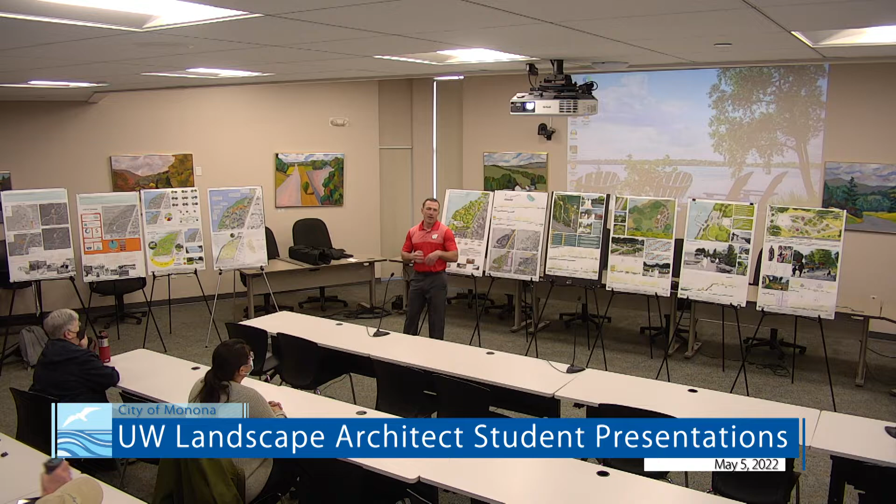Eric Schukart, program director for this program, discussed with the city on ways that students could be engaged in a semester-long program. So we're excited today. I'm going to introduce Eric and then we're going to get along with the students.

These are conceptual plans and just for planning purposes only. It's a great student project. As most of you in this room know, the official consulting project will be kicking off here this summer with a firm that needs to be selected yet. So without further ado, Eric Schukart, UW Landscape Architect.

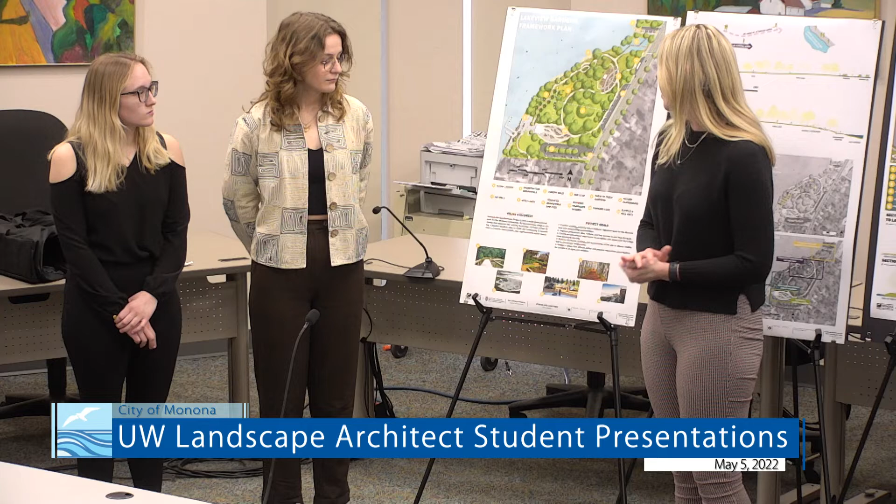Our next site elements include the bus stop along the northern part of the site, allowing for more accessibility and variety of transportation into and out of the site. Number 5 is the farm-to-table gardens, pulled from an inspiration picture, which would allow for greenhouse space and a variety of raised and ground level planters for different plant sizes and types. The nature playground is pulled from inspiration as well, using existing materials on site, possibly removed trees or other natural materials, allowing for a more immersive experience that appeals to a wider demographic and encourages imaginative play among the kids.

The seventh element in our framework plan along the western side of the site is a lit walkway, which will be bordered by paper birch on either side, which grows well here in Wisconsin. For the paving, we'll use stepping stone pavers to keep with the natural feel of the site, with the goal of not changing too much of the existing landscape.

The next element, number 8, spans this entire open green space and will be more of a traditional park space with open lawn, park benches, and a lot of canopy cover, which could be used for picnics, open gatherings, and passive recreation.

Over here, this gray spot, it might be hard to see, but this is a terrace boardwalk and pier, which extends out from the San Damiano house and is aimed towards getting a greater connection to Lake Monona.

It's kind of hard to see, but there's an accessibility ramp. Right now, the shoreline is not too accessible, so the goal was to expand that shoreline to make it a space people can use and utilize that amazing view out to the lake.

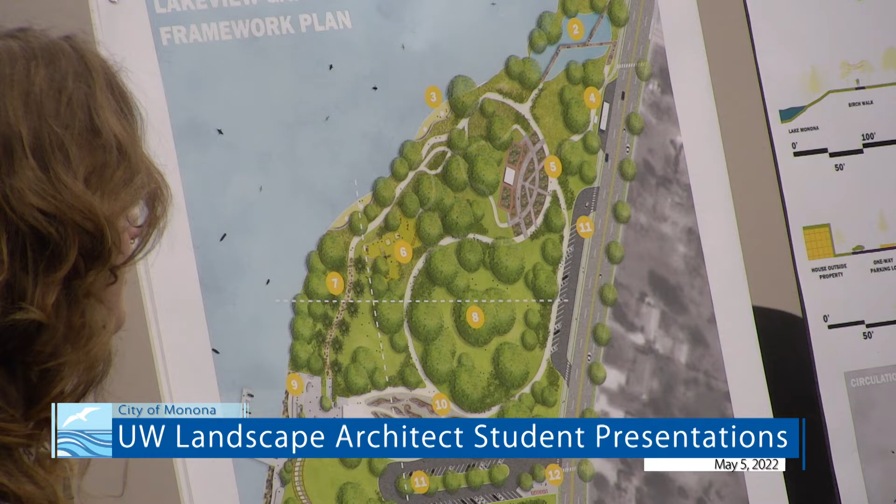The current site has a carriage path that goes up to the San Damiano house, and that's currently the only paved pathway there. Right now that's around 0.16 miles, but we're proposing adding 0.86 miles of pathways to the site, which you can see here in the light gray.

And then with the Terrace Boardwalk and Pier, that would add an additional 400% increase in ADA accessible shoreline.

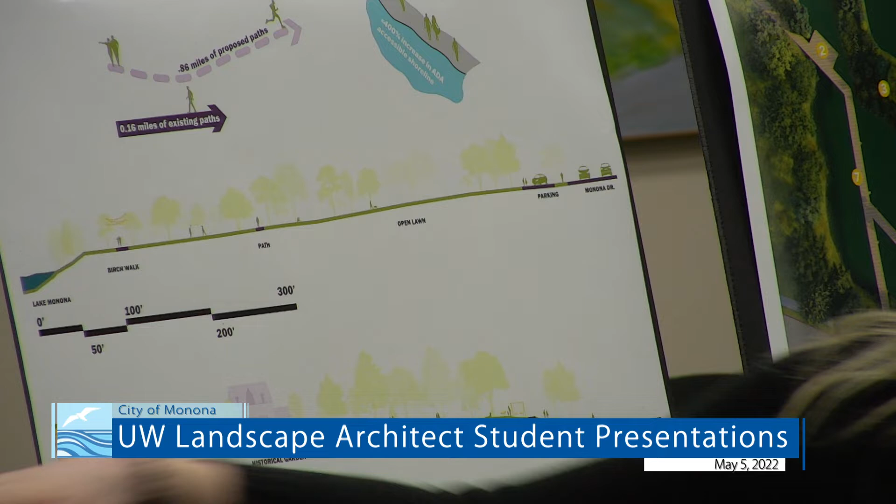For our section cuts, we have the top section cutting through on this horizontal dotted white line, and the second one on this vertical dotted white line. Those give you an idea of the elements and their relation to each other, as well as how our site elements follow the topography of the site, allowing for that lakeshore access.

Our pathways are 8 feet wide as well, to allow for more space, bigger groups, and more accessibility.

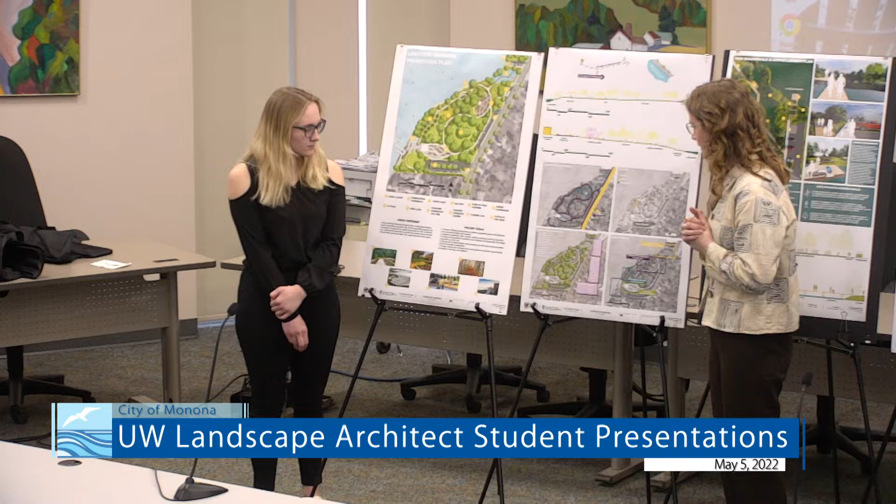Moving on to some of the site diagramming that we did. Right here we have a circulation diagram where we broke our paths and other modes of transportation up into primary, secondary, and tertiary levels. Monona Drive, obviously a lot of transportation is happening along there, so that's our primary circulation route.

For secondary paths, we have the existing sidewalk that runs along the whole site, as well as the main loops that we have within our site.

We are proposing to make a connection through a current private lot that would connect to the Lake Monona bike loop. And then for our tertiary level of paths, we have the boardwalk that we're proposing, as well as the paths that go through the more natural area of the site.

And the garden, as well as through the ornamental historic garden. For this diagram, we have lighting and drainage mapped.

Our yellow dots show where we are proposing to add lighting to make the site a bit more safe and usable during the evening.

Something to note is this walk that we're kind of focusing on to create an experience with maybe draped lights. And then for drainage, we're proposing a bioswale in the parking lot to collect water from that surface, and then drainage in there.

With all of the pervious pavement that we're proposing in this area, we thought drainage along the shoreline would keep those pollutants out of the lake, as well as assist with erosion along the shoreline.

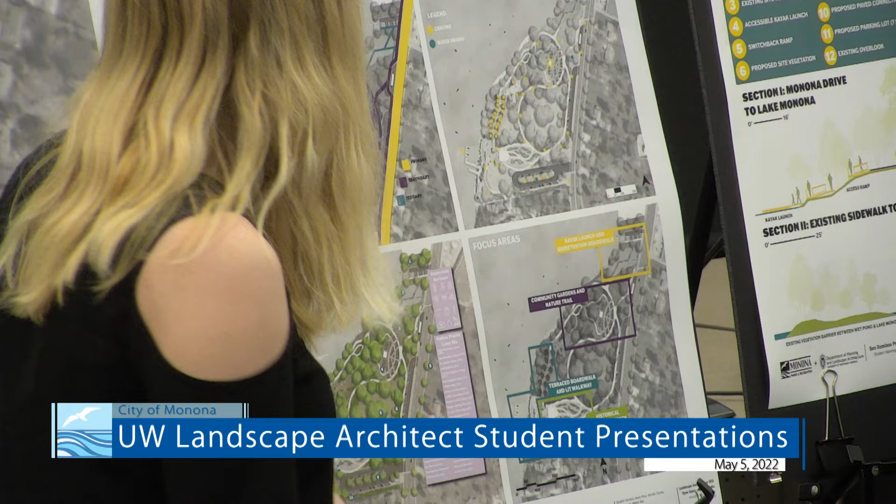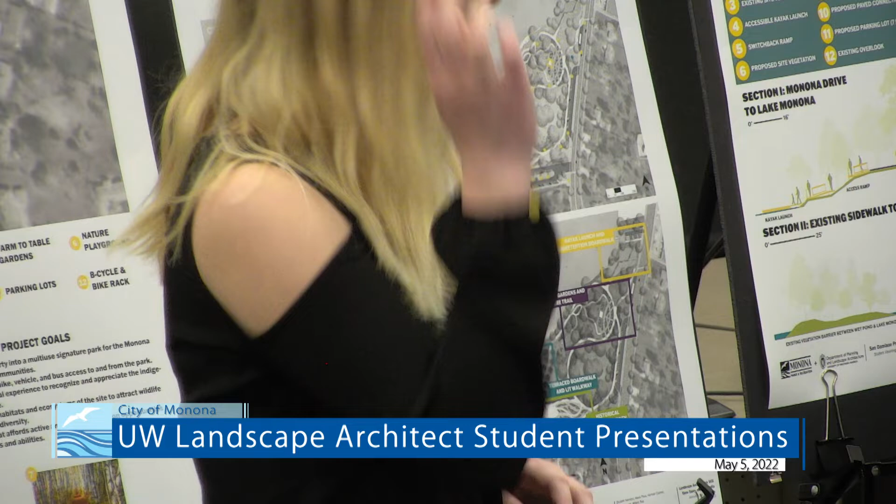Moving over here, we each picked a focus area to go more in depth. So the first focus area is the kayak launch and bioretention boardwalk. Second is the community gardens and nature trail. Third is the Terrace boardwalk and lit walkway. And then lastly, we have our historical narrative garden.

So with the new boardwalk and kayak launch, this is a plan view of what that site would look like. As you can see, we are proposing buying the lot directly adjacent to the site that's currently vacant. There's not very many trees, it's pretty flat. There is a 10-foot change from here to the lake, but I'm proposing that we put a switchback ramp going down so that it's ADA accessible and less of an extreme drop down into the water.

Labeled by numbers up here, this is the connection to the existing path. This is kind of an overlook, so you can look directly out onto the lake. And then these are just the site vegetation. And at number 4, that would be the actual kayak launch itself.

So with that, it would be a launch where you're able to slide down a set of stairs into your kayak and then go out from there. So people in wheelchairs are able to use it, and that would be the only kayak launch with ADA accessibility in the Madison area on Lake Monona.

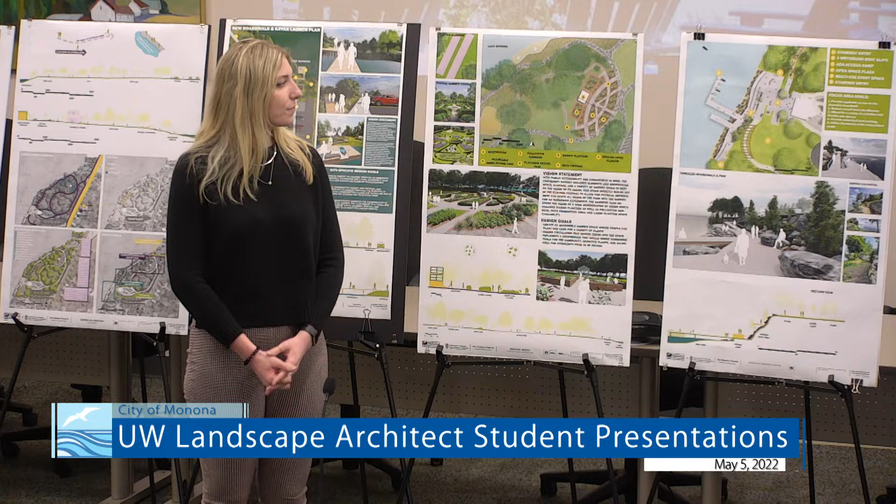Alright, for the next focus area, we have the Terrace, Boardwalk, and Pier. I don't know if you've been out to the current property, but this is one of the areas with a pretty steep slope down to the water with a small lookout terrace, which we heard from Jake was a really popular destination for people coming to the site. So with those views, we really want to accentuate that with this Terrace, Boardwalk, and Pier without interrupting the landscape too much.

A few of the elements we have are 2 stairway entries at the top and bottom, 5 motorized boat slips, an ADA access ramp that will provide wheelchair access down to the first level of the boardwalk, a multi-use event space which will be open lawn with a pergola in the front. This could be used for anything from weddings to company parties or anything like that. And then an open space plaza in the front of the San Damiano house.

So with that goal in mind of not being too intrusive to the landscape, we've scattered a few boulders which will provide flat seating on the top level of the plaza, as well as down on this first level. As you can see, they're pretty low, but with just one level of a wood planked boardwalk that's about 2 feet above the existing grade, it'll allow for easy access to the water.

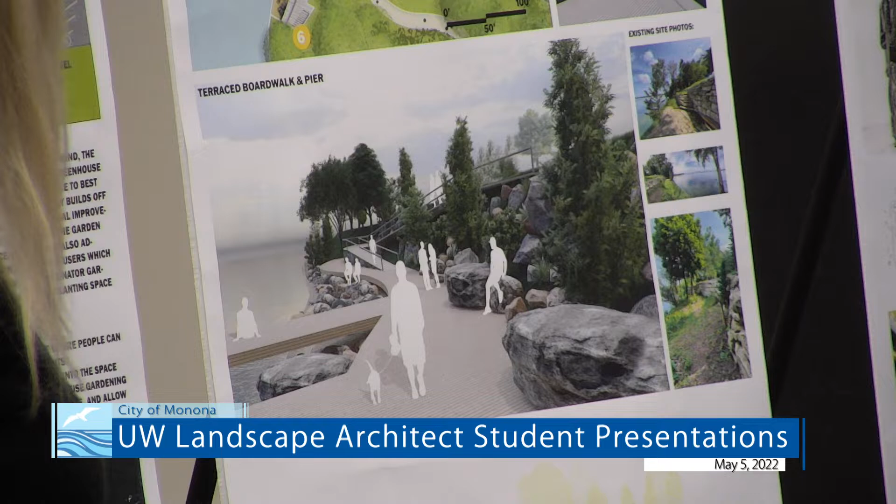It doesn't take away from being able to walk along this shoreline, which I'm sure a lot of people would want to do when coming to this feature. And then lastly, it also just provides that connection to Lake Monona that I think is kind of missing right now. So with that in mind, it has a sort of natural circulation coming from this, one of our only built elements, down to the water.

Then here's just a section that cuts through, which gives you an idea of how high everything is off the ground. We have the access ramp in orange, might be a little hard to see, but then the boat pier that comes out to the water, and a natural rock wall that'll reduce some of the erosion going into the lake, and also just be in keeping with the natural tone of our framework plan.

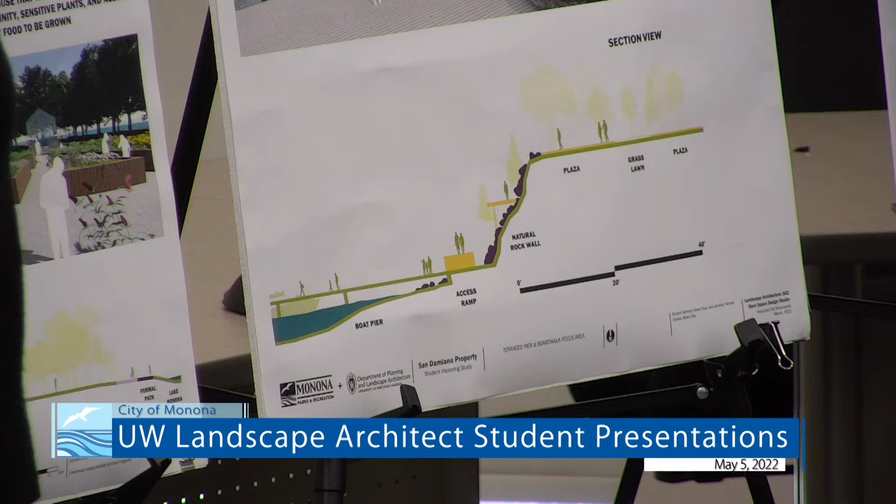Right, and lastly, my focus area was the historical narrative garden. Here is my site plan. So the vision that I had for this space was to uniquely tell the history of the site. The site has very rich history that we analyzed previously, and I thought that it would be a good opportunity to include that in the actual physical landscape.

So the ornate planters that you see are kind of inspired by traditional Ho-Chunk textile design. I thought that our space really needed a tribute to the indigenous history, so I wanted to emphasize that. Traditional women's applique, as you can see in these photos, served as the inspiration for these abstracted forms.

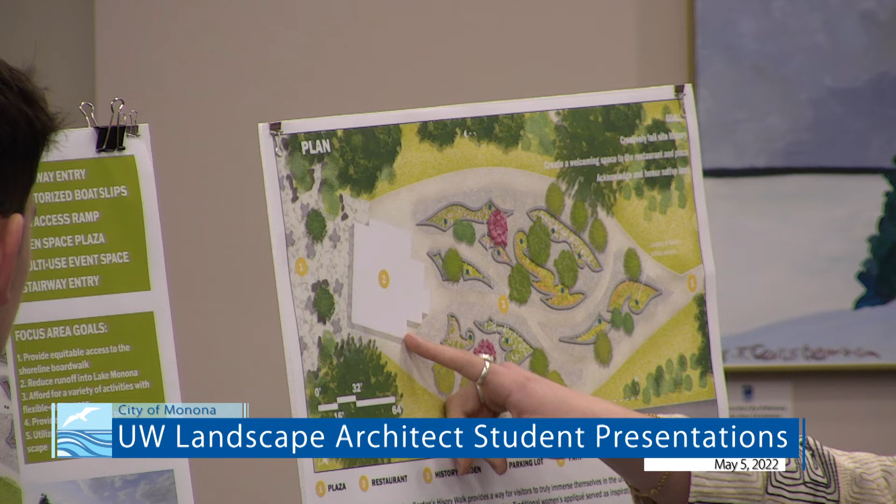Going through the plan, we have the plaza on the back side of the house that we are proposing to convert into a restaurant right here. Then the history garden itself - these small teal-colored dots show the location of small historic exhibits, small statue artifacts that would provide guests a way to educate themselves as they walk through the site. And then we have our parking lot that connects to the garden itself, and the existing pathway.

So you can see here the process I went through of abstracting these ribbon work designs that are popular for formal wear.

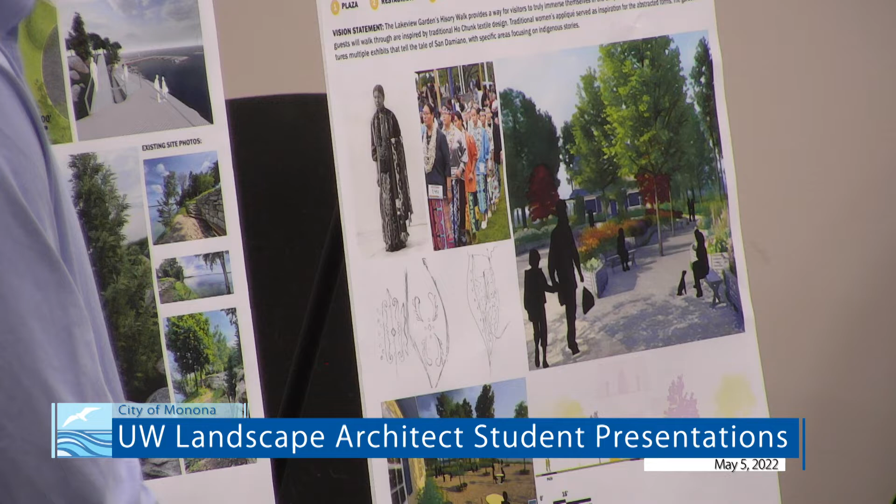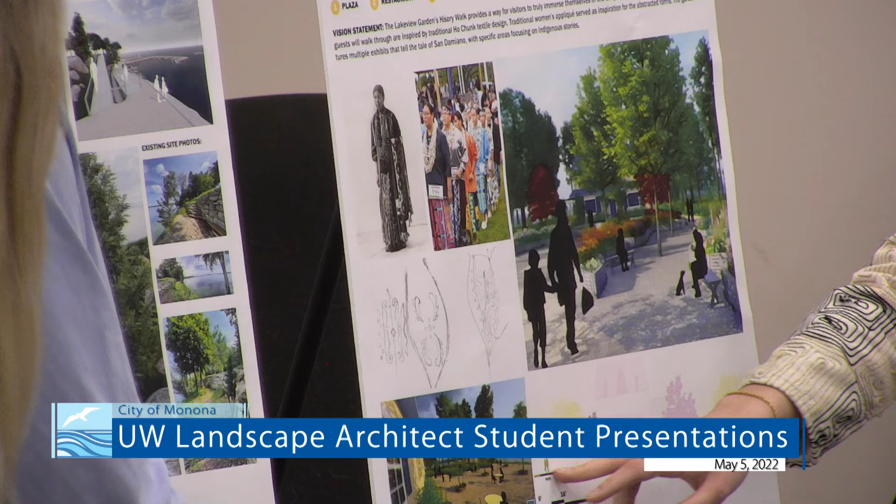I have two sections. The first here cutting through vertically, you can see the path and how it leads you in. The house is in the background, and we have the planters, which are about 1.5 feet off the ground.

This other section cuts along the bottom and looks at the site from the parking lot. You can see the plaza in the back, and then the planters in front of the house, which I'm imagining being planted with a mixture of ornamental and wildflower plants - lilac, maybe orange tiger lily, brown and black-eyed Susan, butterfly weed.

Thank you all for your time. Does anybody have any questions?

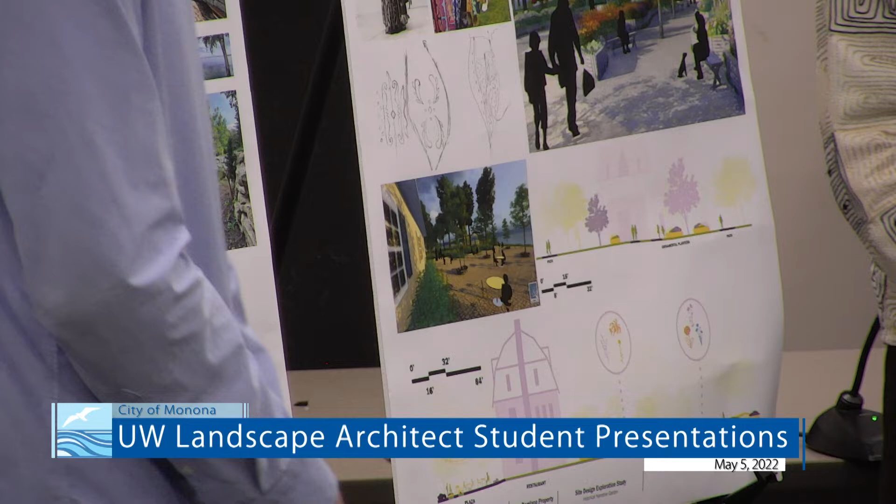Now, does anybody have any questions? Hold on, guys, stay up there so I can get your picture. Next year.

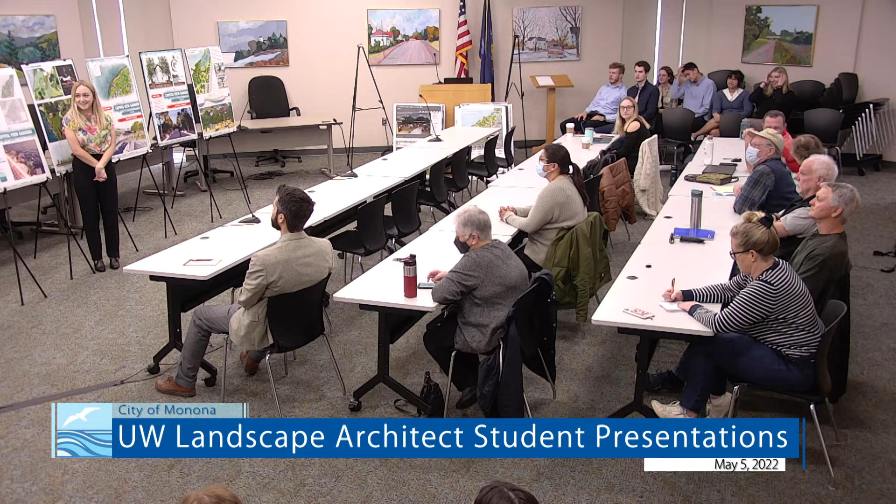So our project here is Capitol View Gardens. The name is similar to the last group. Great minds think alike, I would like to think.

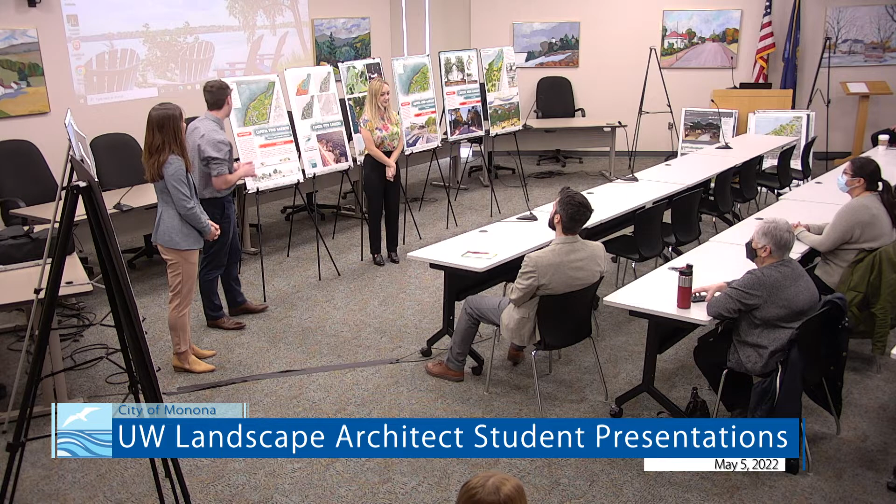We'll start with our vision statement here. Capitol View Park transforms the prior San Damiano property into a stimulating and inviting space, bursting with activity and vitality. Exceptional event spaces empower countless opportunities for recreation as the site strives to become a beacon and the center of Monona's vivacity, defining the city's blissful spirit.

Capitol View Park also aims to enhance its different wildlife habitats as it fosters biodiversity for different wildlife and vegetation, while exemplifying ecological awareness by integrating bioretention systems already existing on the site, enhancing those for different stormwater holding capacities, and thus keeping our lakes clean.

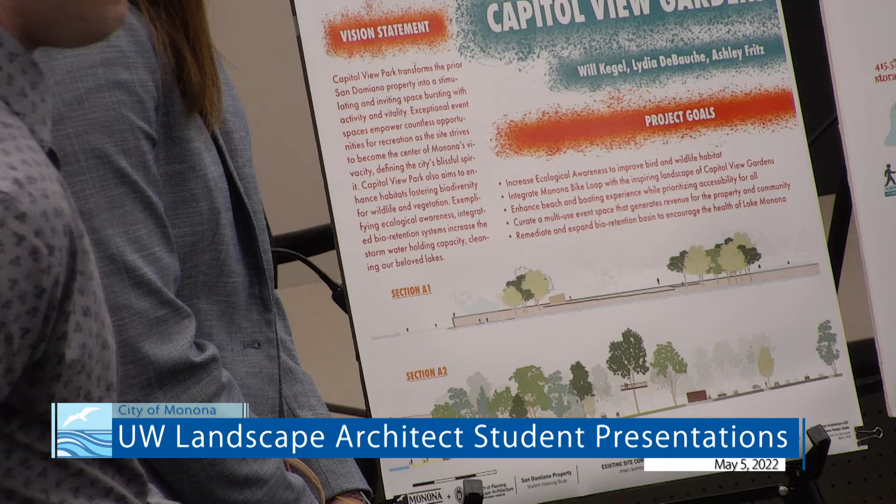We have 5 main goals for our project, including increasing ecological awareness and creating more of a habitat for birds, since birding is something that's currently used at the site. We also wanted to integrate the Monona bike loop into our site - we noticed there was a missing link, and this would be a great place to include on that bike loop. We also wanted to enhance the beach and boating experiences, since this is a popular spot for boaters to come and park.

We also wanted to bring that experience onto the land a bit more, creating a multi-use event space that could generate revenue for the community and become the heart and soul of the community. We also wanted to remediate and expand the existing stormwater system into a larger bioretention that will keep the lakes clean and healthy.

To talk through the site: first we have several overlooks to tie in the amazing views, as Capitol View is our title. There's an overlook right here, and then formal gardens as we created an event space. There's also our parking here, which fits about 60 spots.

It's a loop type circulation, so you come in here and you can turn through here, or go over here to drop off people for whatever event may be happening, and then you can also circle back through this way.

Parking goes both ways. We also have overflow parking, as events will accommodate a lot more people versus your day-to-day capacity. This will be in reinforced paving, so it will look like grass, but there'll be pavers through there to support parked cars.

There will be public restrooms over here by the adventure playgrounds, as that's typically where day-to-day people will be with their kids, hanging out, having a good time.

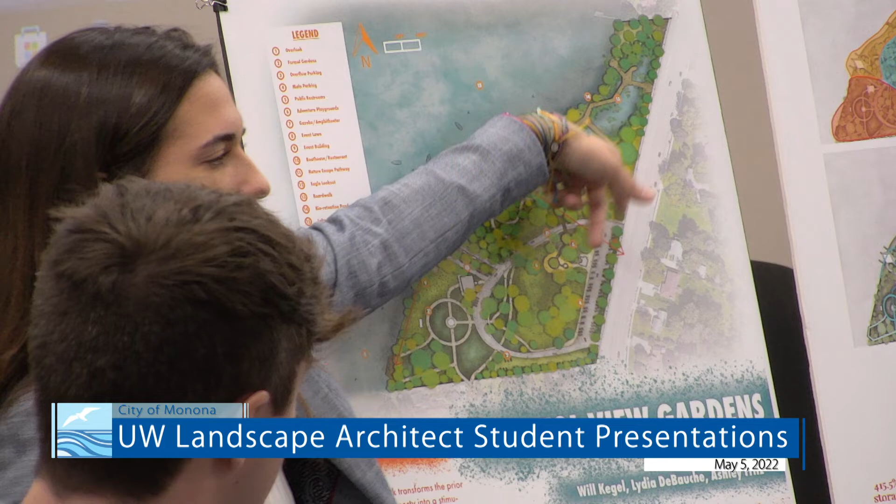There's a boardwalk here through the bioretention basin, which accesses the street here as well. There's a current bioretention here, but we are proposing to expand it, following the natural grade of the site. And then last, Lake Monona, which is kind of where all our thing is based off of.

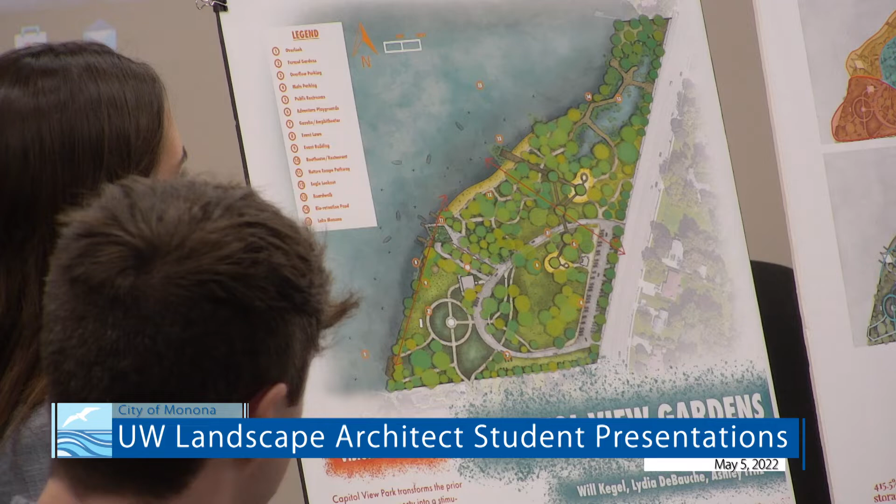On this board, we break down our site into 3 main zones: the nature recreation zone here in blue, the beach recreation zone in orange, and then the event space here in red, which includes part of the house and the part across from the house in the center of the path.

This diagram shows the main circulations of the path. In blue are the primary, secondary, and tertiary paths, but the main thing that's important is the Monona bike loop path through the site. It has its own dedicated path for part of the site, then goes through the nature recreation zone, through the woodland, and over the boardwalk and out.

That connection can be seen larger here. This is the connection that we made through the site, and it fills in a very large missing link that takes you off the water. We're proposing that it goes through our site and remains a true lake loop.

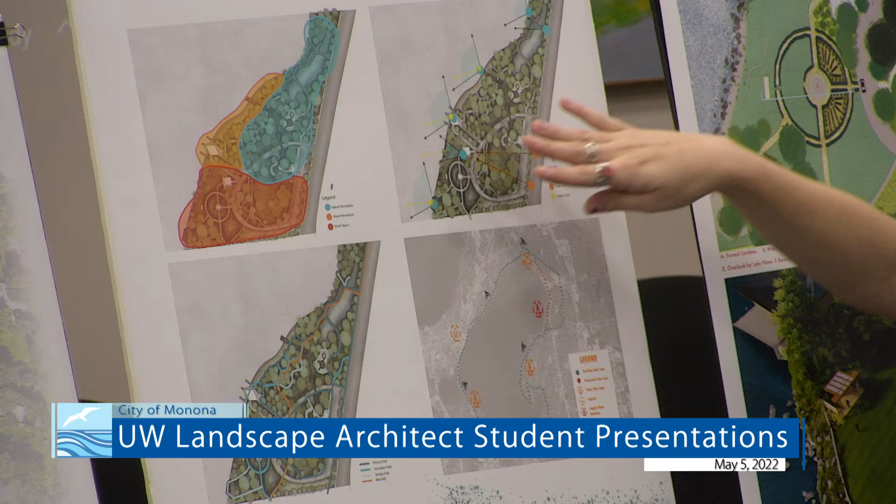Here you can see the views of our site. We were able to highlight these stars as Capitol views. The position of the site is very unique and has really great views of the Capitol, so we wanted to make sure we had as many Capitol views as possible, as well as many lake views, and some screen views of the estate from the road, so people know it's there and feel a lot more welcomed to the site than they are currently.

Through this, we were able to increase the storage capacity of the bioretention basin by about 400%, which is a huge increase, especially because it's the City of Madison's water, so we want to make sure there's enough room for it. We were also able to add about a mile of pedestrian paths through the site, an increase of 280%.

We were also able to decrease the turf area by 63%, so there is a lot more ability for stormwater to be absorbed by the ground, and a lot less maintenance.

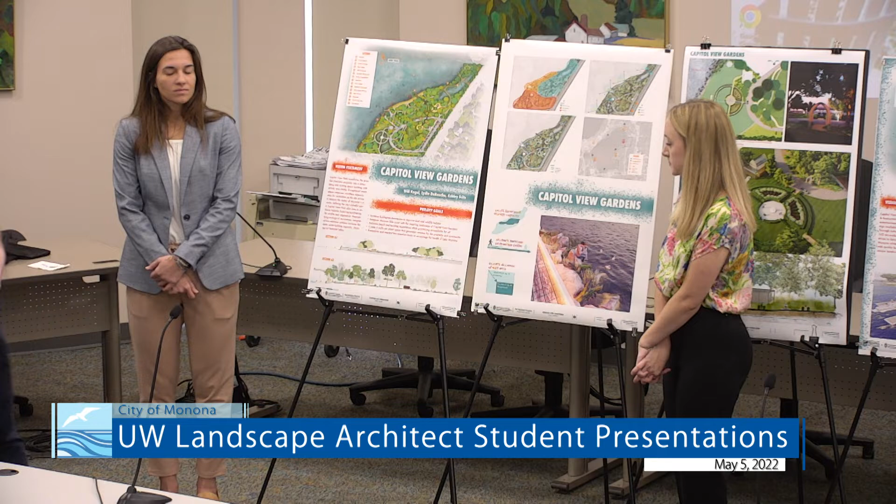Finally, we have this render here of 2 boys sitting on the rocks right on the lake. We really wanted to bolden that connection to Lake Monona. I think this render encapsulates all the goals and objectives of our design. Although we have big ideas like the boathouse and event structure, what it really comes down to is the human connections made in our park.

Now we'll go into the different focus areas. I focused on the event space.

This is based off of a formal garden, and formal gardens usually have 2 axes. The first axis runs through the middle, connecting the whole site to the water, and the other incorporates the neighborhood with the other built structures of the site.

This might be a little small to see, but this view runs down this axis. You can see there are different built structures all the way to the lake to concentrate that view to the water.

There will primarily be plantings in these 2 sections—hydrangeas, heavy on the flowering shrubs—and this space will be open. All the paths connect all the way through.

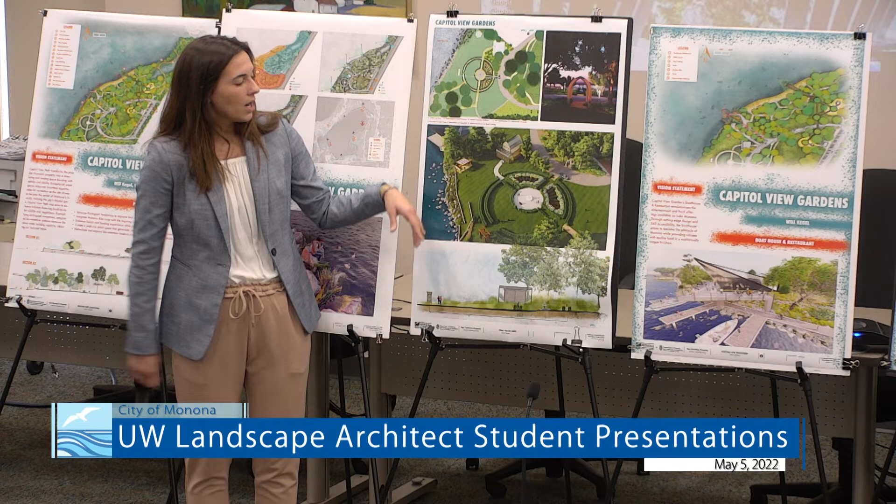This would be the gazebo, a way for different concerts or events to be held outside. It's also set up for the possibility of weddings being rented out, set up in front of the water with the arbor, while there's seating in the lawn space.

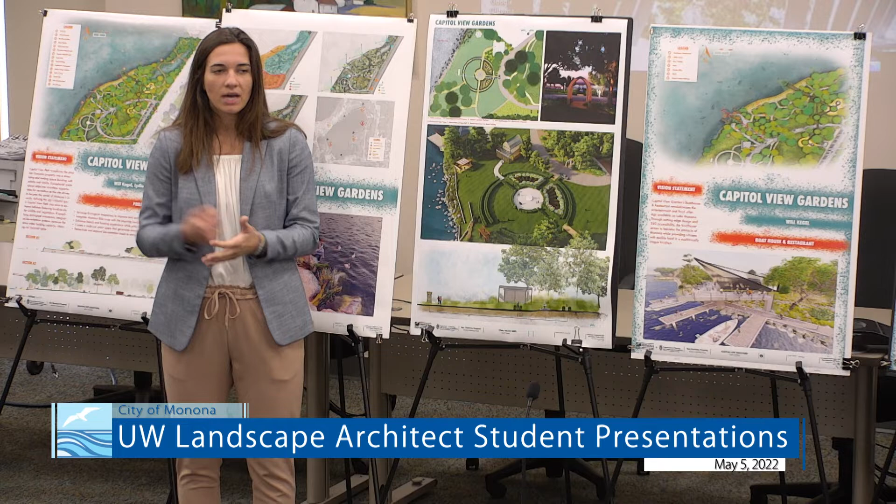This is a potential possibility of a building that could be there. There's a lot of really cool glass in the original building, so we propose to keep that glass and incorporate it into the new building, with a lot of sunroom-type areas as well. Also restoring the shoreline with rocks and plantings.

Moving on to the next interest area, this is the boathouse and restaurant shown here. A quick vision statement for this specific area.

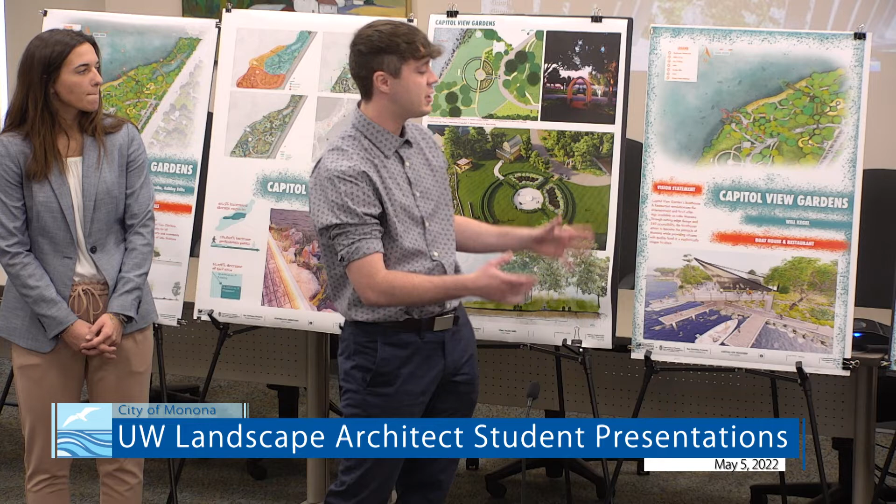Capitol View Gardens Boathouse and Restaurant revolutionizes the entertainment and food offerings available on Lake Monona through cutting-edge design and 360 accessibility from both land and water. The boathouse strives to become the pinnacle of Monona while providing citizens with quality food in a euphorically unique location.

Looking at this plan view, you see the boathouse. It actually juts off into Lake Monona, giving interesting views and opportunities for people to eat on the patio, right over the water.

Under that, there are different routes that are ADA accessible, and it also offers boat parking, continuing that 360 accessibility. We really just want to create a cool area with an emphasis on Lake Monona, very accessible from both ways.

So you have people boating, making a quick stop for a bite to eat, and we also have this beach northeast of the boathouse. We're really creating an area similar to Peninsula Park, if you're familiar with that indoor seating concept.

Moving on, here are some section views from the front of the boathouse. I wanted to develop an alley that creates a sense of space and generates views right towards the front of the boathouse, with an alley of trees and lights overhead, making this space exciting for both daytime and nighttime attraction.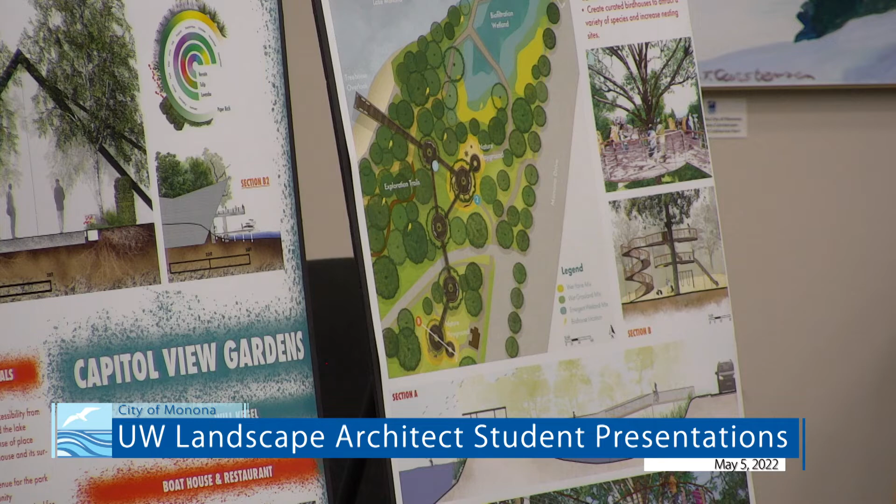The goals of my design were to introduce native species, to increase and attract wildlife, and to create a biofiltration system to better handle the stormwater.

I wanted to foster an immersive experience for birding, totally immersed in nature, which is a very unique experience about the site. I also wanted to utilize a hierarchy of spaces to allow active and passive recreation to occur harmoniously, and to create curated birdhouses to attract a variety of species and increase nesting sites.

So in the biofiltration wetland, I created a planting plan that includes a wet prairie mix, which will have a bit more flowers and be a bit more pleasing to look at, and then a wet grassland mix, which can be found along all sides of the wetland, and also an emergent wetland mix, just to increase the amount of natural species, to better take pollutants and sediment out of the water.

The raised boardwalk features seating and telescopes to look throughout the site at the birds and also out to the lake, which you can see in this picture here.

It connects to two nature playgrounds. One of them can be seen here, featuring a lot more slides and multiple levels. It's tailored a bit more for younger people, and this portion of the treehouse is a lot more aimed for children and for play.

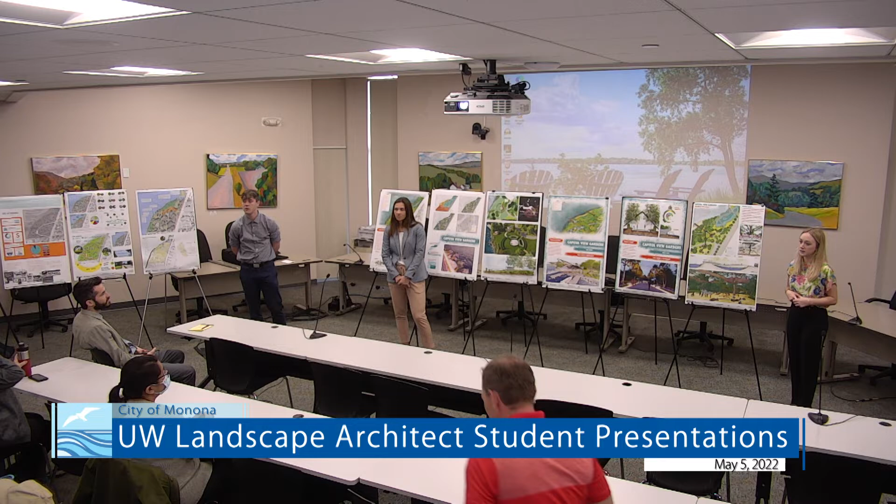How do you see the blending of your nature area with your boathouse, your vibrant restaurant area?

Yeah, that's a great question. So what we were really thinking, our first idea in the whole design process was to really create an event space. Jake talked about generating some type of revenue because it was such an expensive cost. So we thought immediately, right off the bat, creating an event space and then also a restaurant and a boathouse like that. But also, we looked at the northernmost part of the site and we saw the retention pond that's already there. And we thought that was a really good opportunity to build upon that. So spreading that nature and that woodland area that was existing, and kind of trying to blend that into some of the more commercial aspects of our site.

Yeah, we definitely included a pretty heavy vegetation buffer right there. So if people are coming for more of the calming, peaceful experience, they can still get that over here in case there are events going on over there. It's kind of like a dual site.

Additionally, we have a hierarchy of paths, so you can see here, this is more of a gravel path that would be for exploring, and then this is the main recreation path, and lower we have a fully accessible boardwalk on the beach. That kind of separates the three areas: nature recreation, further exploration, and the beachside boardwalk.

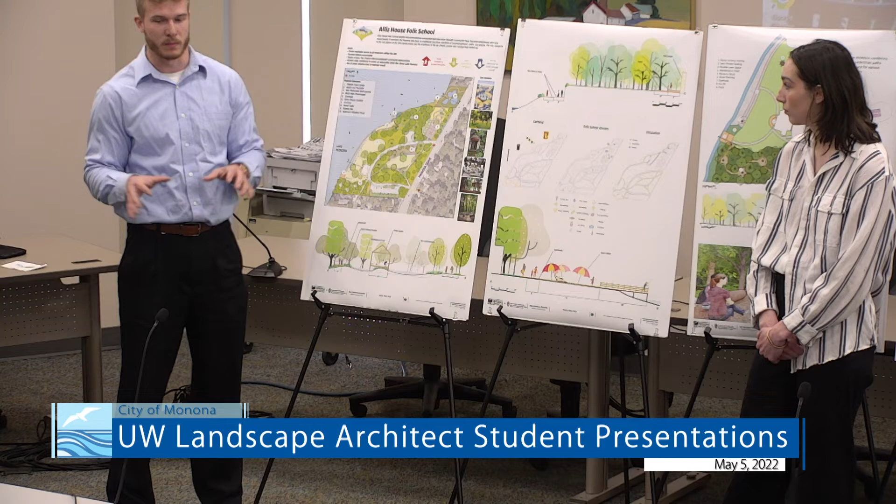So for our framework plan, right away we had to make space for a big open lawn for multi-seasonal events, including Snow Snake by the Ho-Chunk people, which would be a key event during the winter, for example, because we wanted to keep the site and preserve the historic legacy of the site itself.

The next area is the beach and facilities. There's a couple of sheds on the site itself in this section here.

Right down here, having space for storage, bathrooms, and other facilities, looking out to the water, having a sandy beach, because currently it is more of a rocky surface.

The next element is the Bird's Nest Playground, which is in the center of the site, which we'll focus on later in the project. It provides a playground space for the school itself, the folk school, giving space for the kids.

And then next we have an overlook cutting through near the site. This is kind of outlining the connection to the shore right here.

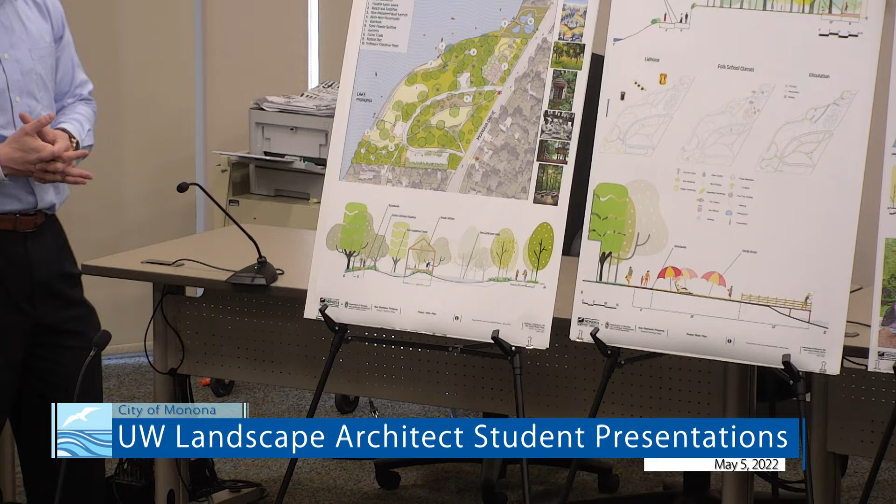Continuing with number 6 here, this area is some semi-private seating, which can be seen in this perspective. We're also vegetating this area more heavily, which will provide that semi-private seating experience while also doubling as a buffer to the homes that border the site.

Number 7 is these gardens, featured on the last board. Those gardens will have 3 different types of gardens, as well as seating, storage, and a swale that runs across the road to catch runoff coming from Monona Drive before it hits the plants, as well as capturing that runoff before it makes its way to the lake.

Number 8 is the forest trails, located at the northern end of the site, which was already more heavily wooded. We're proposing to make that canopy cover more dense and add nature paths, with a little section of relief for seating.

There would be seating and a fire pit, which would really help with bird watching and promoting the natural habitats of the animals present on the site—if you take a look at the inventory boards, there's a bit more detail on those.

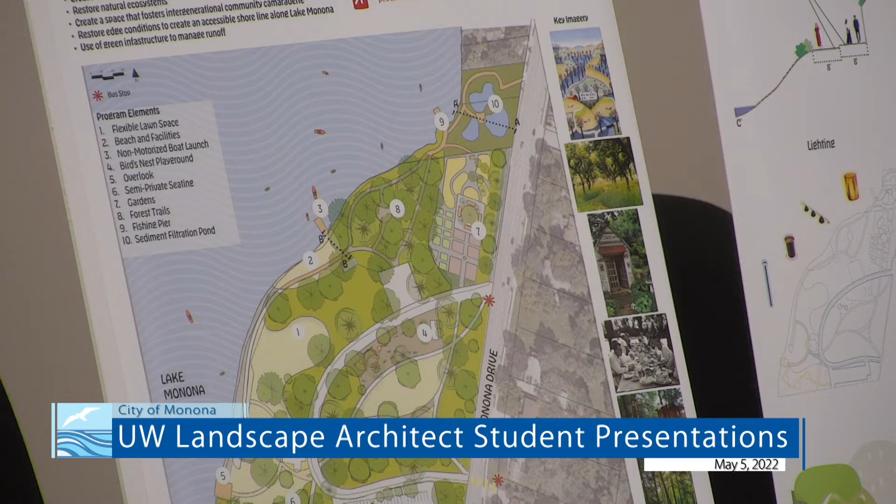Number 9 is a fishing pier, located near this wetland in the forest, providing a little quiet relief for fishing. We're proposing this would be a bit wider and remain in place permanently throughout the year, since it would be a hard spot to pull out for the winters.

Number 10 is the sediment filtration pond, which can be seen in this section here at the bottom. We're proposing 3 different ponds—the first is where that culvert comes out, and this would be the largest of the 3 ponds, with each pond filtering a different size of sediment.

The largest pond would filter the biggest chunks of sediment, the second the next size down, and the third the smallest. These ponds break up the amount of water coming into the site, and planting them with wetland vegetation allows water to seep out further should there be larger floods.

We're using those ponds as a feature on our site—right now there's just a big hole, so we're bringing it into the design as an element.

With a platform here, which you can see, this could be used to teach about the different wetland plants and wetland animals, as well as a boardwalk that runs through this area and connects into the sidewalk along Monona Drive.

Looking more closely at that is this section here, and you can see the sidewalk as well as a little buffer before the street, and the wetland plants.

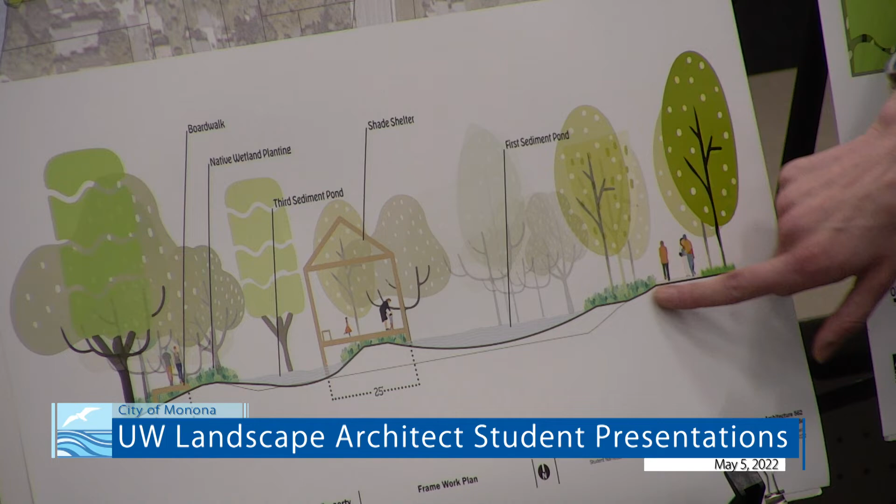Things would run into this pond. This platform touches all 3 ponds, giving an immersive experience, with the boardwalk connecting into that fishing pier and then into the more forested, dense area.

So this diagram here shows the lighting on the site. We thought that the area surrounding the house would be lit at night, and we wanted to keep the more natural areas dark at night. So these three types of lighting are dark sky friendly.

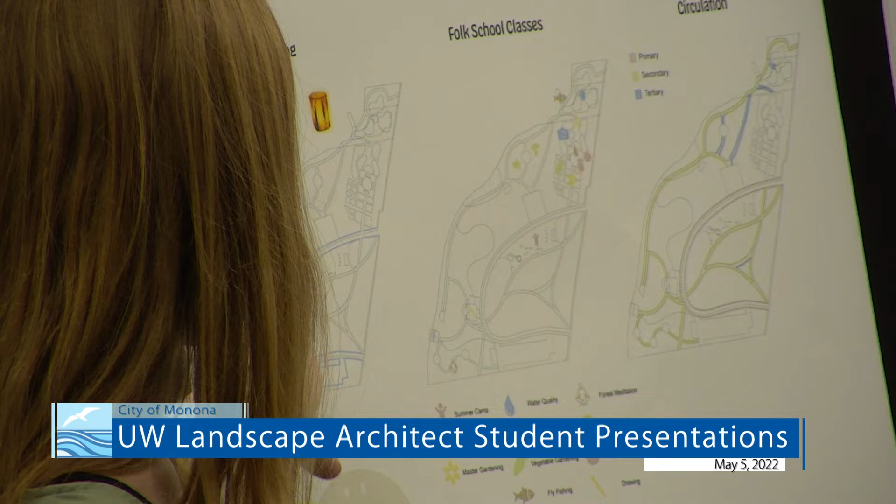Around the carriage path, the parking lot, and the sidewalk outside the house would have street lights. The path connecting the house to the overlook and the ramp would have in-ground lighting, and the overlook and porch would have string lights. The path through the woods would be lit with stumps, which are lit from the inside.

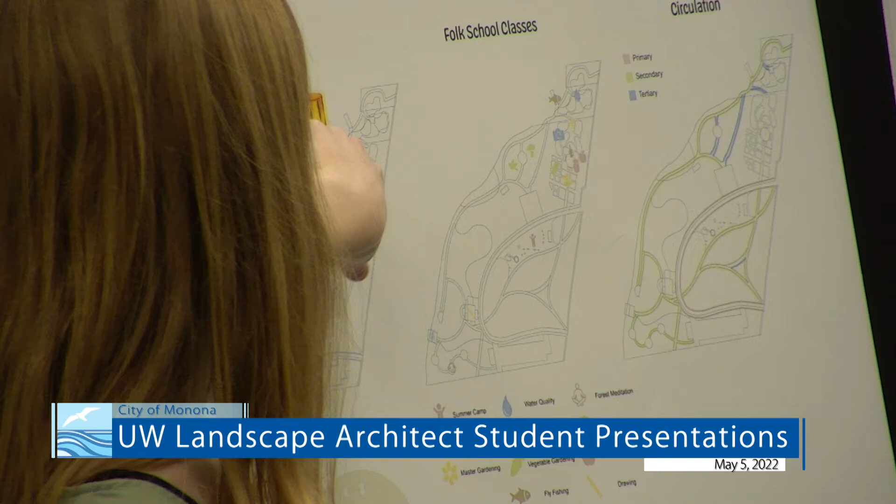Next, looking at the folk school classes and the kind of curriculum that could happen here, and connecting that with key elements on our site.

Some things like summer camp could happen all over the site, but focusing on our nature playground area and the house. Bird watching and other natural things like mushroom foraging or wild plants would happen in the wooded area.

Things like beekeeping, master gardening, vegetable gardening, and fruit tree grafting would happen in these gardens, and jam making would happen between the gardens and the house.

Things that could happen all over the site, like drawing and photography, both focused near the house and allowing people to spread out across the site and explore.

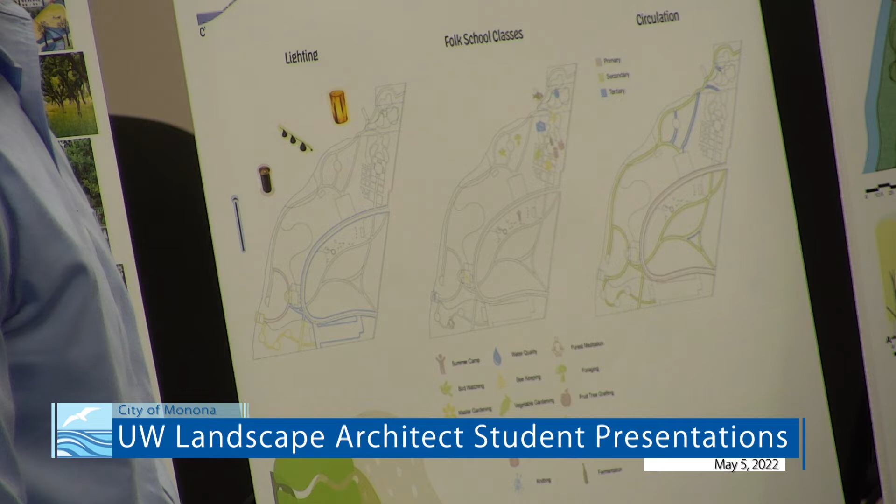Things with more traditional roots like knitting, sewing, embroidery, and weaving could happen within the site, allowing them to spread into the overlooks, the lawn spaces, and the private seating.

A big thing like forest meditation and other things like that could happen in the forest, in those little private seating nooks that we've created.

For circulation, revitalizing the carriage path itself would be the primary form of circulation running through the site, as well as cutting through the middle with more secondary paths near the open lawn space at the center, wrapping around the natural areas.

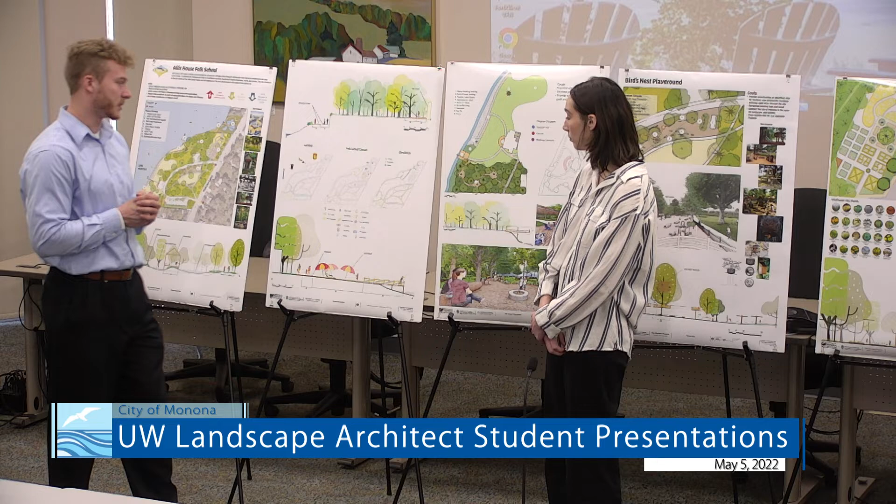But near the forest trails, there are more tertiary pathways breaking off, creating more intimate settings for visitors to utilize.

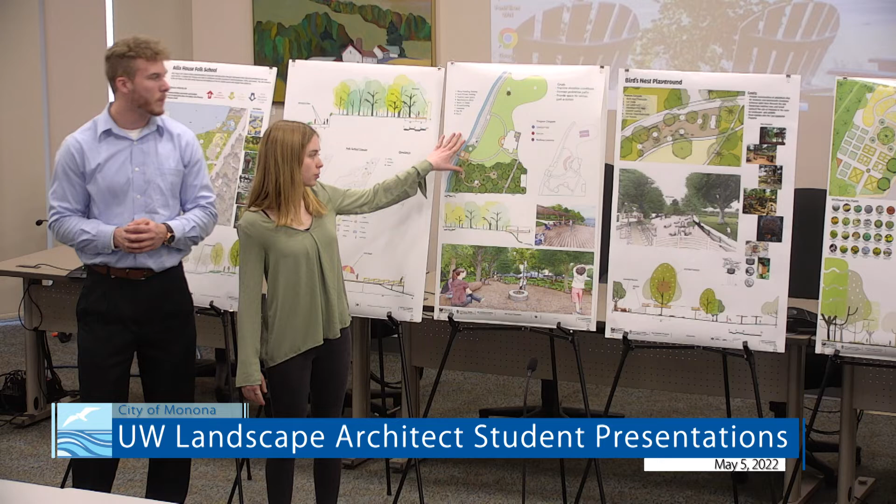I chose to focus on the southwestern part of the site, just outside the house. Goals for this area were to improve shoreline conditions, increase pedestrian paths, and provide space for various park activities.

In the plan you can see there's a flexible lawn space, a larger fire pit, a ramp to the shore, a landing on the ramp with a smaller fire pit, the porch, the overlook, and the seating areas in the woods along with the maintenance shed.

This diagram shows how this area of the site could be used in different ways. For example, an outdoor class could take place on the overlook, a concert could take place off the patio, and a wedding ceremony could take place in the flexible lawn space.

This section cuts through here and shows the overlook, which goes out over the water and is half covered. This image shows how the overlook is spacious and has room for different activities such as an outdoor class.

This image shows one of the seating areas in the woods with a fire pit, and you can also see the view of the lake and the overlook.

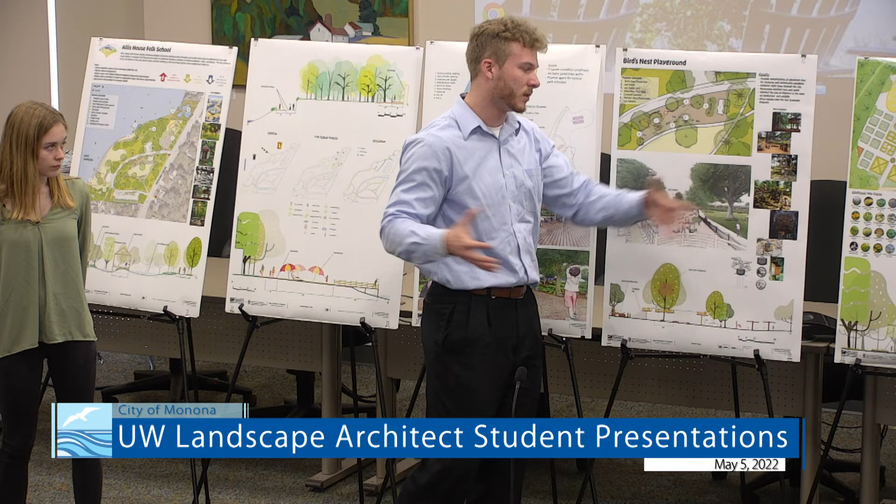Next, there's some log swing sets, as well as adventure play was a big thing to utilize for existing students to build their own area to play in and learn from that. And then a covered seating area for parents or teachers from the folk school to view the children or community members, having sight through the entire area. And then some log tunnels for them to crawl through, which help formulate the circulation through the area.

As far as the treehouse itself, this is a nice diagram using the branches present on the site, but with a wood base on the interior to form around. It's a 13-foot high, 20-foot wide base structure with ladders to climb into, providing an intimate space for users. It also includes bird feeders and bird houses throughout the site to attract local wildlife, as well as a protective fence accessible by key to keep out unwanted visitors or after-hour activity.

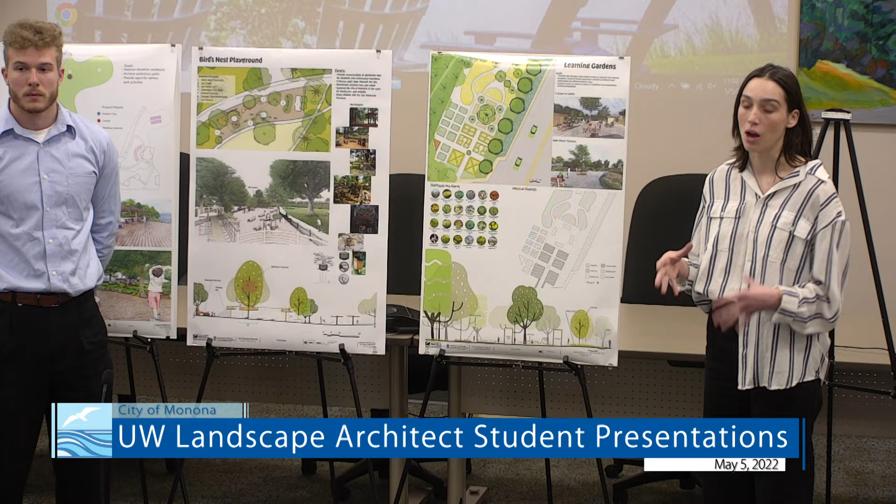So finally is the learning gardens. You would enter through this path adjacent to the carriage path running through the site. As you enter the formal gardens, the axes lead you into the seating area, pictured here. In the seating area, there's both a tool shed and a material shed giving people resources on site and the opportunity to come and use these gardens, as well as opportunities to sit and gather with people.

Then there's a small outdoor kitchen, nothing super fancy, like a stovetop, so people can make tea and enjoy the gardens. On the other side, there are workbenches where, if there's been a harvest or a floral arranging class, you can have that space to spread out materials and work with what's on the site.

Moving back towards the site, at the very far end bordering that wetland, we have bee houses. Surrounding those, we have wildflower beds with a seed mix, allowing them to mix and mingle, nothing too formal, giving a prairie feeling, along with organic beds and paths, a few seating options, and trees mixed in for shade, as well as a feathering tree-lined edge, all of which would be fruit trees.

Underneath the fruit trees, there's a meadow mix which promotes pollination for both the fruit trees and the surrounding plants. Bordering the woodland area, we have a vegetable garden with two herb gardens as well. Those would be raised beds to make them more accessible for people. And this little triangle is a composting area.

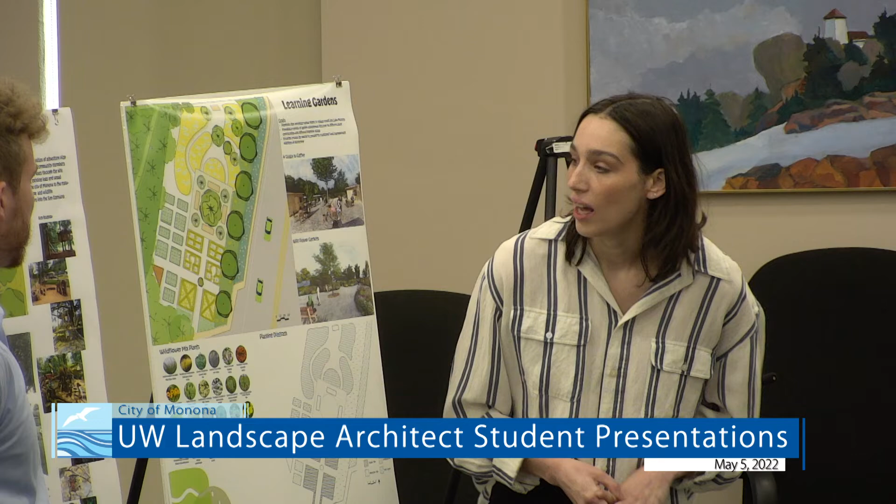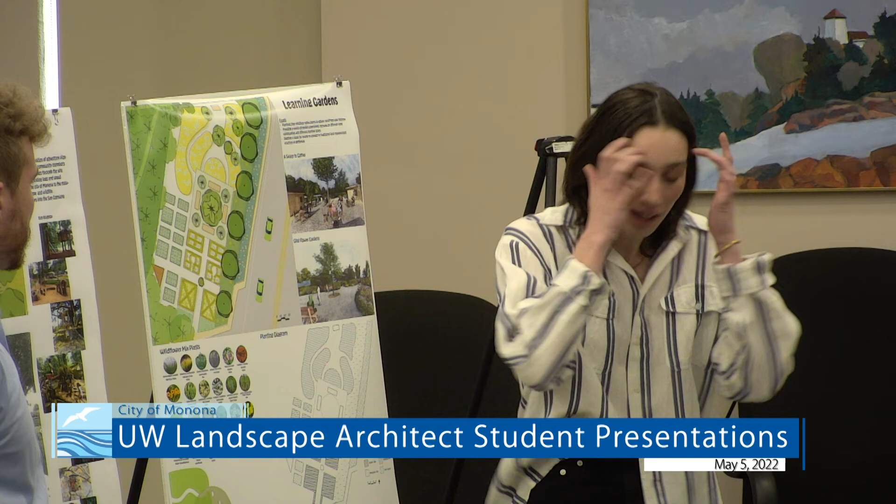Throughout here we have two wider paths like this and this, giving accessibility for people bringing in materials like dirt and mulch, with places to drop them off, like here, leaving small open spaces where people could grab wheelbarrows and similar tools, which would be kept in the tool shed, as you can see in this section. And then that swale I talked about earlier collects runoff from Monona Drive before it hits the fruit trees and wildflowers.

This section runs directly like that, and here you can see the edge conditions—the forested edge as you move into the vegetable gardens, through the central seating area, and then the meadow, the swale, and the sidewalk.

Here in the planting diagram, you can see a breakdown of the types of plants in each area, and this is a blown-up look at one of the mixes. This isn't all of the plants in the wildflower mix, but I picked some key species—a mix of both grasses and flowers. Some of the big grasses would be big blue stem, little blue stem, Indian grass, and Canadian wild rye, and notable flowers would be things like allium, butterfly weed, prairie blazing star, common evening primrose, and other beautiful native plants to Wisconsin.

And so with that, that was our Alice House Folk School. Are there any questions?

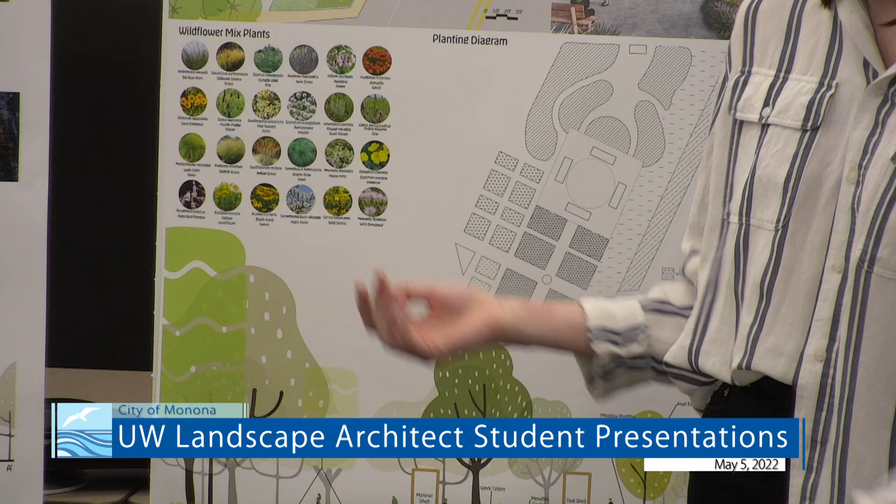Could you explain a little bit more about the swale, what it looks like and how it functions? So it's a little small here, but the swale is like a big scoop out of the ground, and water will run either way. Those are wetland plants designed to suck up that water and trap it, and instead of puddling, those plants will remain alive while their roots are really wet, giving it a chance to evaporate.

So how wide is that green space between the road and your garden? This swale is 6 feet wide. No wait, that's wrong, it was 10 feet wide. So that kind of feature could work along the roadway anywhere?

I had another question. When you're talking about shoreline erosion, what exactly is going on now that you would work with to decrease that erosion? I wasn't quite sure how you would go about that. Well, I wanted to improve the shoreline conditions because have you been out there before?

I have. Right now it's kind of hard to walk along, it's messy, a lot of debris and stuff. So more like cleaning that up, and then along here and other parts of the site, using plants that would help control erosion, but ones with deep rooting systems to hold in the dirt, because we saw there was some erosion on top of just the debris.

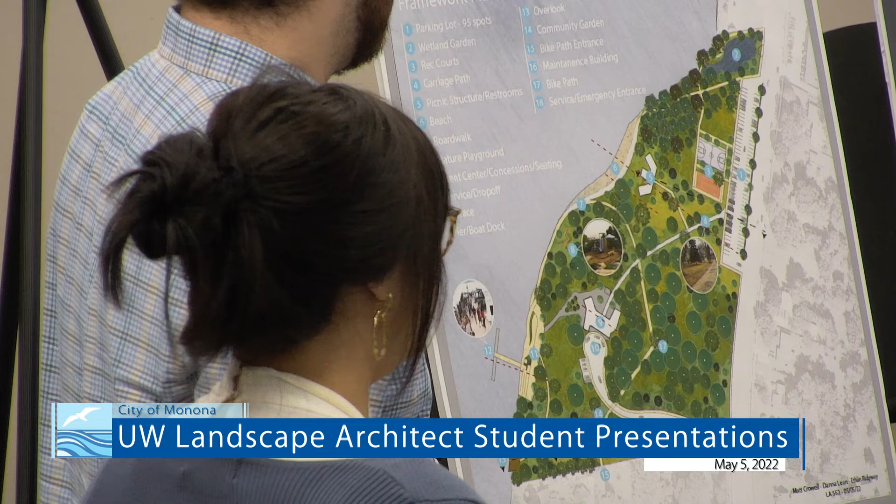For number 7, we have a boardwalk that runs along the beach all the way to our proposed terrace. And last, our nature playground that will be composed of the ash trees that are being cut down currently. And lastly, our event center that is replacing the San Damiano house.

Moving on from there, we have a service drop-off right here that allows access for service and emergency vehicles, so trucks dropping off beer for the beer cart, food for the concessions. And then we are proposing to extend this carriage path, but keep this same line that it has, creating this access right here.

Moving on from the event center, it goes to this terrace area, which has a pier and boat dock, so that'll be an interactive space, eventful, and people can gather there and enjoy the lake views. Moving on from that is the overlook right here, which is a more secluded area, bordered by some canopy.

And then moving on, right here we have our community gardens, which we know the site right now has community gardens right here, and people like to utilize that. So we moved them over here.

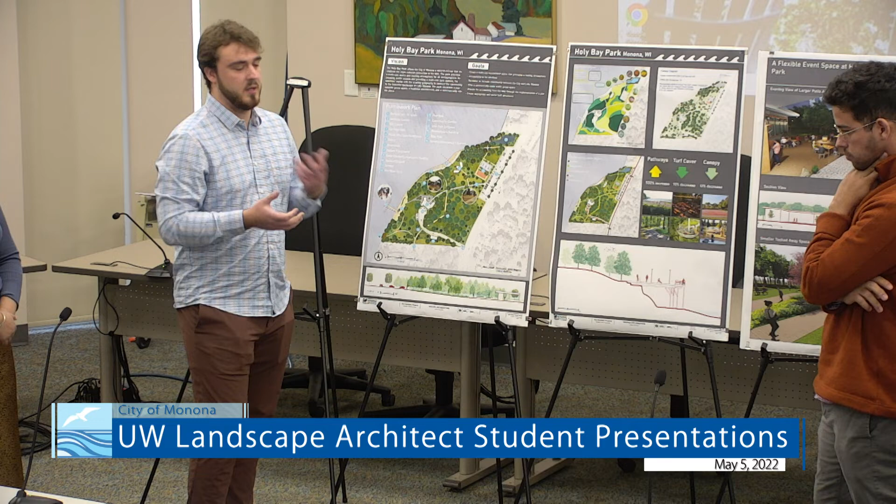We wanted to take away all the lawn and add all these mixes because it adds a lot of biodiversity to the site, brings in a lot of insects, birds, butterflies, and makes the site very enjoyable and nature feeling.

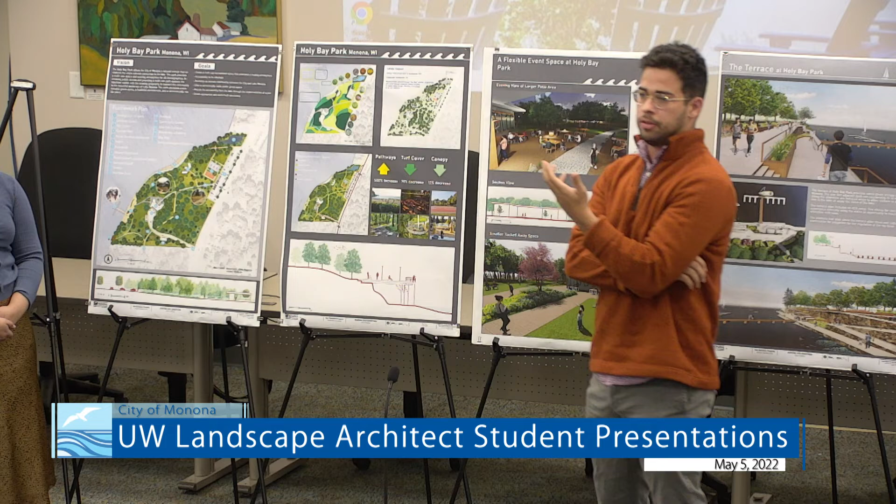For our canopy diagram, we calculated that there is currently 80 to 83% canopy coverage, and with our new design, there's going to be approximately 73% canopy coverage. So there is a reduction, and the proposal is to reuse those canopy trees to build our nature playground.

And then moving on to our pathways and circulation diagram. One of the first things we wanted to do was change up the vehicle circulation, so we added a turn lane to come into the parking lot, so there's no backup with vehicle traffic. Something else we did is we connected the existing Monona bike loop.

We had it run through our site and come out through this neighborhood instead of going through here. It would just be better, and it would also invite more people to use our site.

We have a boardwalk that's running along the shore and along the beach. Most of our other paths are pedestrian paths. Just the bike and pedestrian path is the one that runs through the site. And then we kept the carriage path, and that one leads straight to our proposed building.

And as well as for some other roads, something we proposed is the service access roundabout that would take cars straight to the building. So like Matt said, any types of services, people bringing food, things like that, and also allows for emergency vehicles to have access to the site.

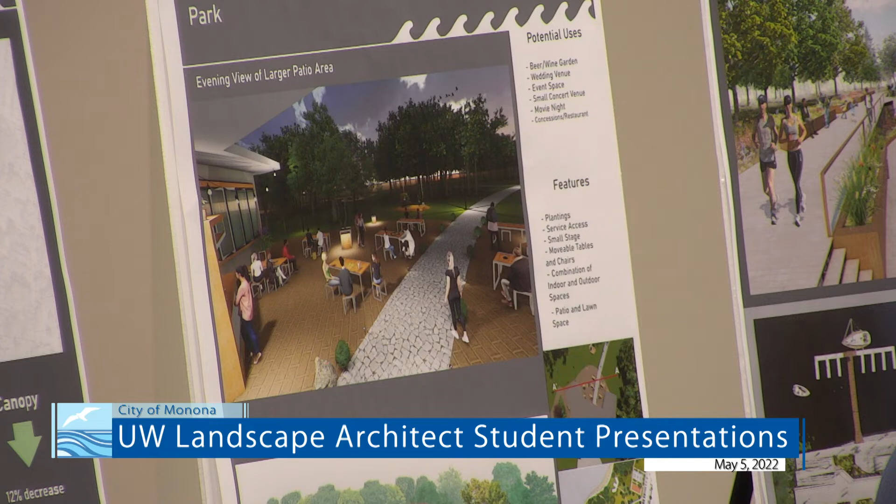I think it'd be a great wedding venue for a wedding reception, just a general event space, a small concert venue, because we did propose a small stage, though it's a little hard to see. Some movable tables and chairs, so you can move things around depending on what type of event you're having. There's also a combination of indoor-outdoor spaces, so since it is a building, you could have an event inside, outside, things like that, and then also patio and lawn space.

For a movie night, you could put a projector up on the stage. People could set up their blankets and lawn chairs on the lawn. Small concerts too, and in the building we were thinking of having concessions or restaurants to help fuel the people in the park. Features in this area include plantings, service access in the back, a small stage, and movable tables and chairs.

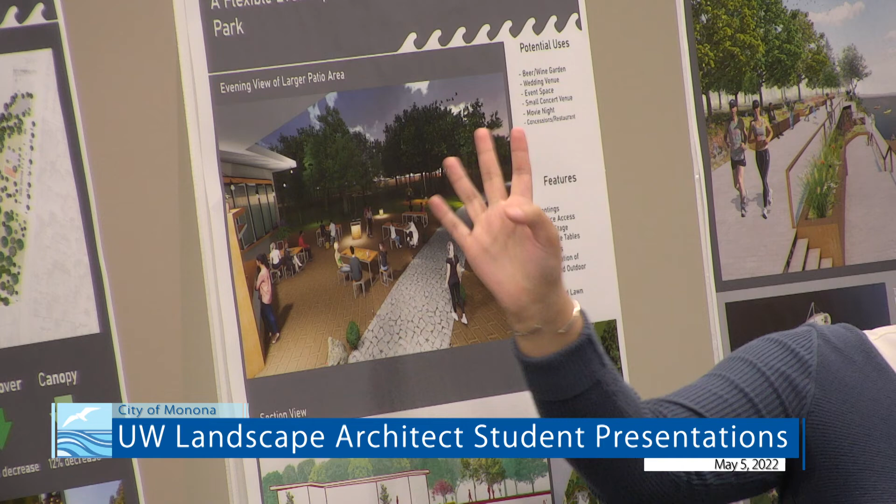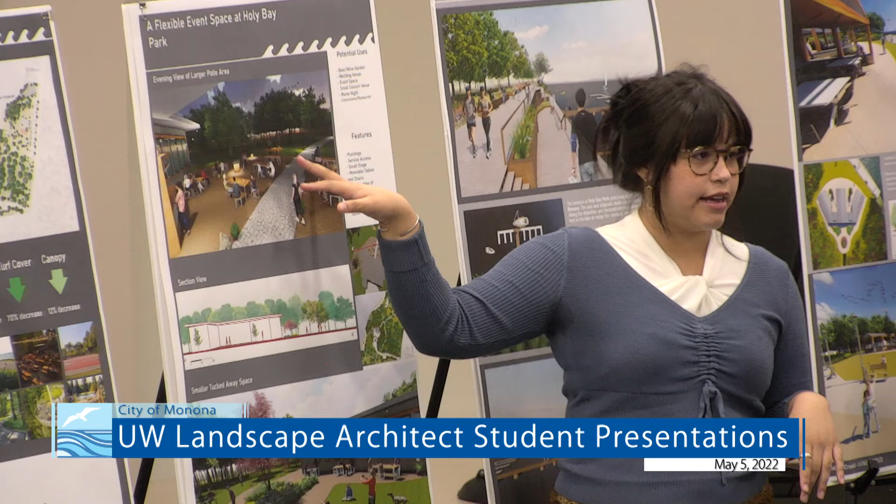I wanted to provide an evening rendering so you could see what the space would look like at night. There's a lot of lighting, like string lights along the roof where it hangs over, lights in the plantings and along this pathway, and some street lamps that provide nice lighting. It feels like a nice inviting space even at night.

There are two main spaces here. There's the front main area, and then there's a side space that's more tucked away, smaller, feels more private and intimate. I think it'd be nice to have two different events going on, maybe a small birthday party here and a larger event at the front, or just keep this one running if someone's having an event here. It's a nice little space.

So yeah, very flexible, and that's what I really wanted to do, so that you have the flexibility to do anything with the space and make it usable, feasible, and really make good money with it for the park.

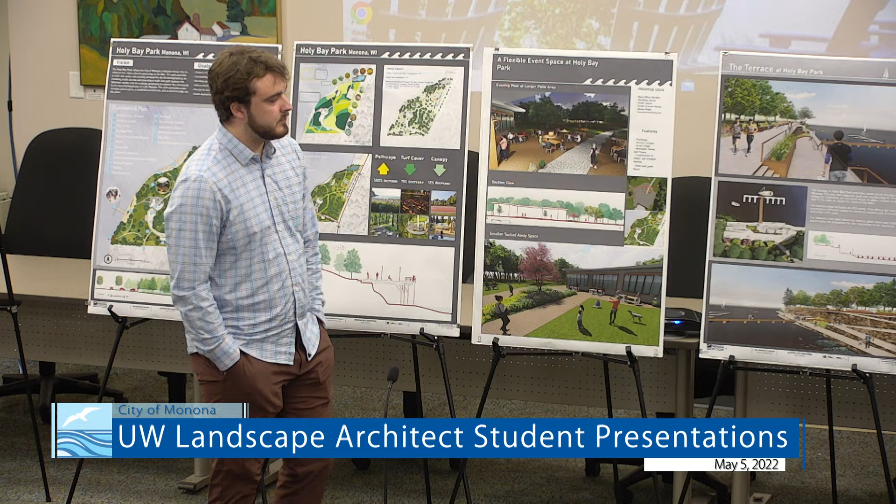Our second feature proposal is the terrace, also intended to be a social atmosphere. The dock hosts about 10 boats comfortably. It has an ADA ramp, creating an accessible point for whoever would like to use it, as well as access from the beach. This would be the wraparound boardwalk that leads you to the beach.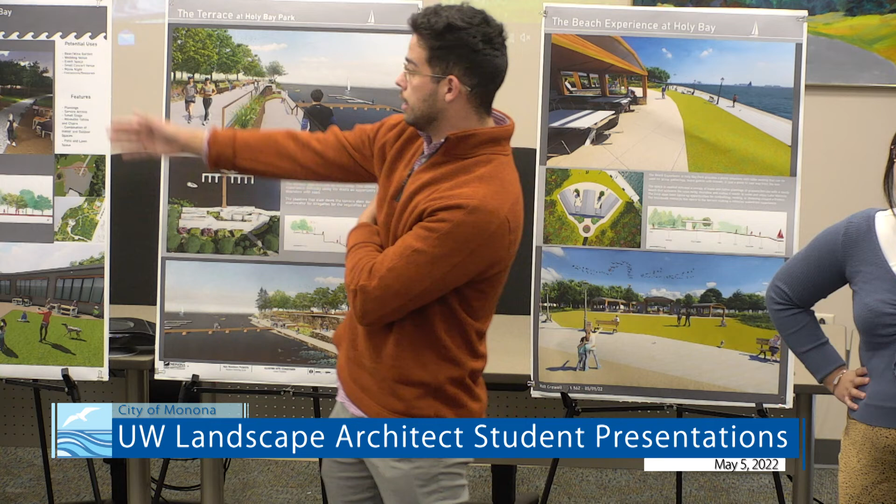The planters that step down act as retention for stormwater, so that all the water that flushes off the top surface of the terrace doesn't just run straight into the lake.

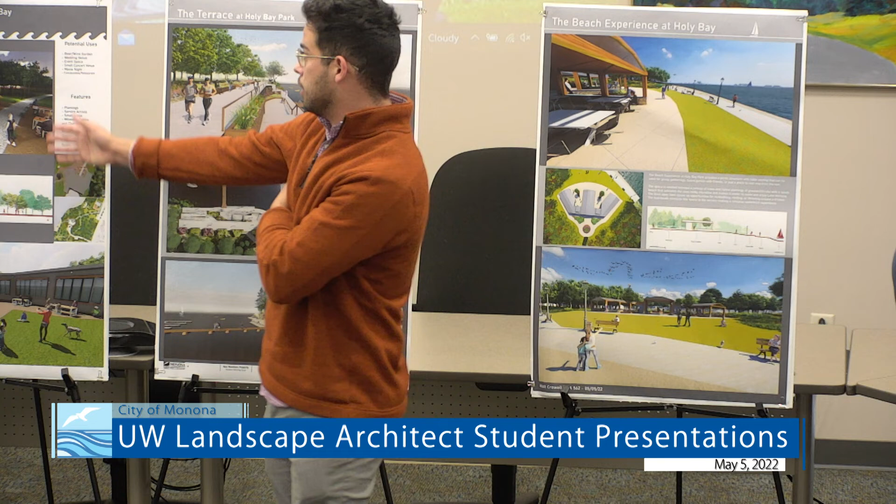It also provides quick access for kayakers to come along and reach into the park itself, and the pier is also connected to the flexible event space. As you can see in our plan view, it leads you directly through a path to the event space.

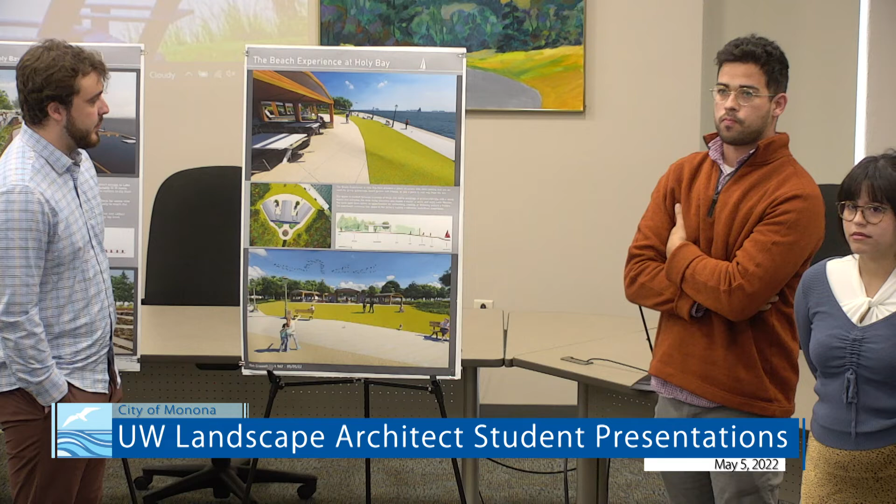Moving on to the last focus area, the picnic and beach area, labeled as the beach experience. The beach experience at Holy Bay Park provides a picnic structure with table seating that can be used for group gatherings, board games with friends, or just a place to rest and get away from the sun.

The space is nestled between a canopy of trees and native plantings, and a sandy beach that activates the once rocky shoreline, making it easier to enjoy the lake and swim and do other activities. The open lawn provides opportunities for sunbathing, reading, throwing around the frisbee, and also has the boardwalk that connects to the terrace.

For this view, you can see the picnic structure with people sitting and enjoying the space. You can see in the background the skyline of Madison, which creates good views. It can be an active space or a resting space.

Right here is a section where you can see Lake Monona going up to the beach and this gradual incline to the flat pavilion patio area, along with the plant beds. I think this view gives a great look at the materials of the stone boardwalk and the wood, and natural colors that fit into the canopy of trees and natural plantings.

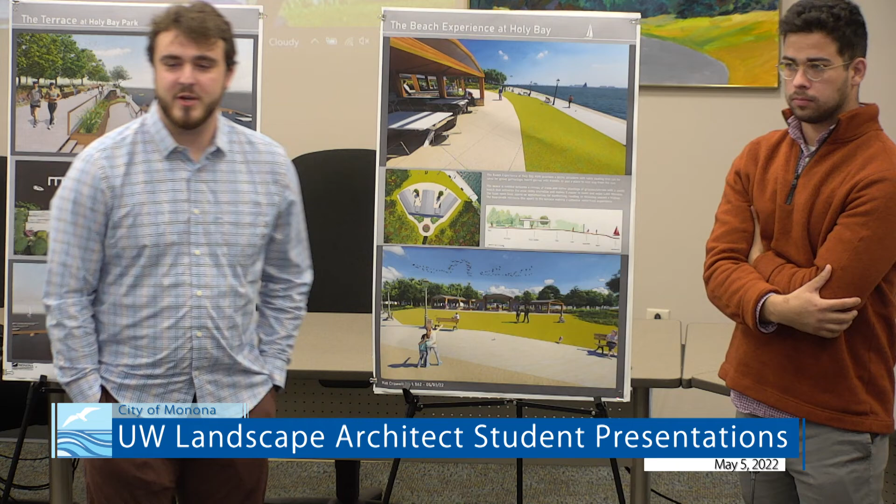I was wondering about Holy Bay—was that a name that existed, or did you create that? It's existing, yeah. We named it after the Holy Bay right there. So the area where the boats tie up in the summertime is commonly referred to as Holy Bay by the motorized boaters. Oh, really? Yeah. So we thought that would fit in the adjacent park. Yes.

I have one more question. With parking, if your parking space for 95 cars is a one-directional parking lot, do you need less width for angle parking versus straight-in parking? Do you know what the width would be for angle parking versus straight-in parking, and how much less space you would need to use up?

For straight in, we designed the parking lot to be 10 feet wide, each stall. I'm going to assume that a diagonal, looking from curb to curb, if you're pulling straight in, you tend to need a little more width because you're swinging around.

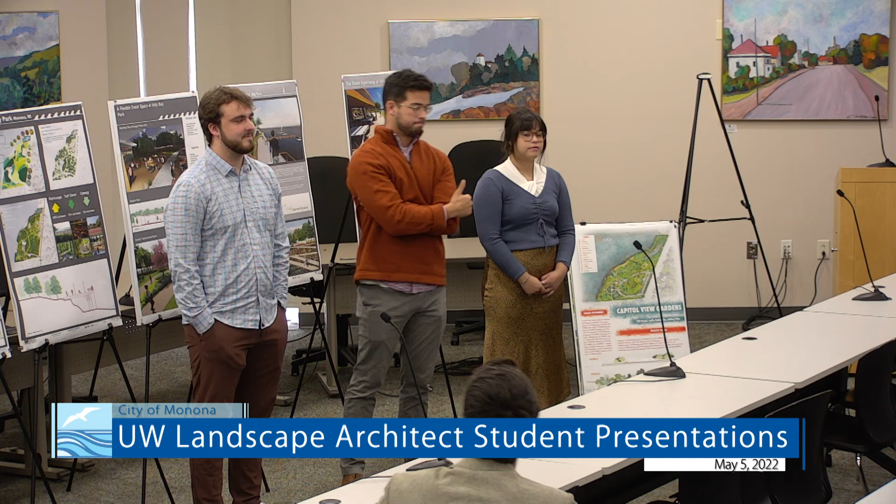All right. There was so much stuff I wanted to say.

Thank you for joining us today. This was their first time presenting in person. Given the past 2 years of the pandemic, everything's been online. So a lot of this project was doing stuff both as a group, learning how to work together as a group, doing stuff individually, coordinating all the drawings you see up here between each other, making sure they feel like one project versus just someone's individual board.

They spent about 3.5 weeks from, it was trace on paper, if you would have seen it with Jake 3.5 weeks ago, so the amount of work that they developed to end the semester is tremendous. I just want to give them a round of applause for all the hard work they've done this semester. So, all right, thanks guys.

And good luck with it. I know you guys are kicking off the project, so you're going to have consultants soon, so hopefully this spurred some ideas about how you can utilize the shoreline, the different program elements you can integrate into it, from birding, thinking about parking, how much do you actually need? Is it only 30, or you saw here in one of them it's 90? Do you provide new access points that take a look at not only along the main drive here, but into other parts of the neighborhood?

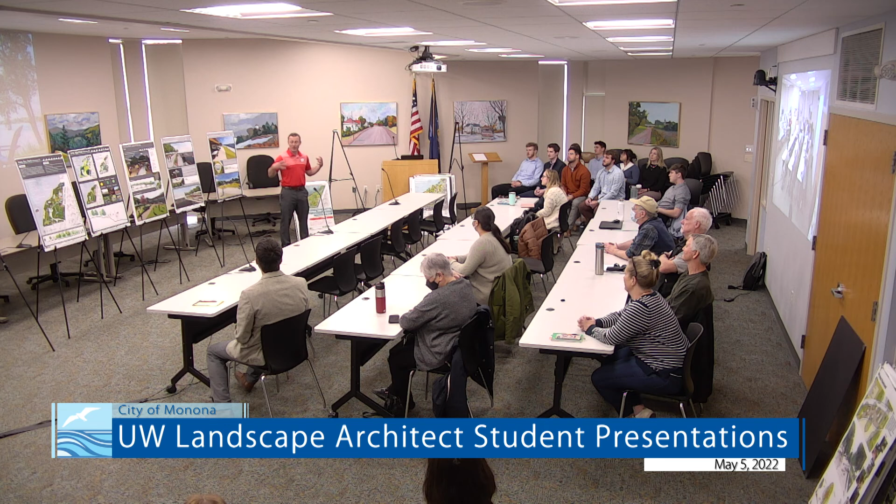I think this will be really helpful as we kick off the project in reference to, sometimes it's like, I don't like that, but I like this, versus what do you envision in a future space. So this will be beneficial, I think, to the process. And again, these are junior level students at UW, and so I think the effort and the presentation today was excellent. So I very much appreciate the time that you guys did.

And thanks for coming. If we can keep you for like, I don't know, 10 minutes, to answer some questions on your overall plan from some of the members, that would be awesome for lunch. So thank you guys.